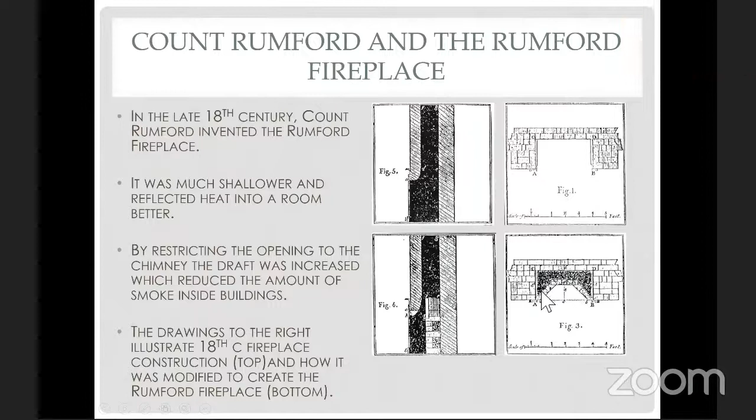Rumford developed a shallower firebox, and you could see this one was actually drawn as a renovation of a walk-in fireplace. You see they're much shallower. They have angled side walls to reflect heat into the buildings, so they're more efficient.

You also see that the flue itself gets necked down, and you see this bit of extra construction here necks down that flue and creates a smoke shelf. He was very inventive and worked through the dynamics of smoke being drawn out of homes.

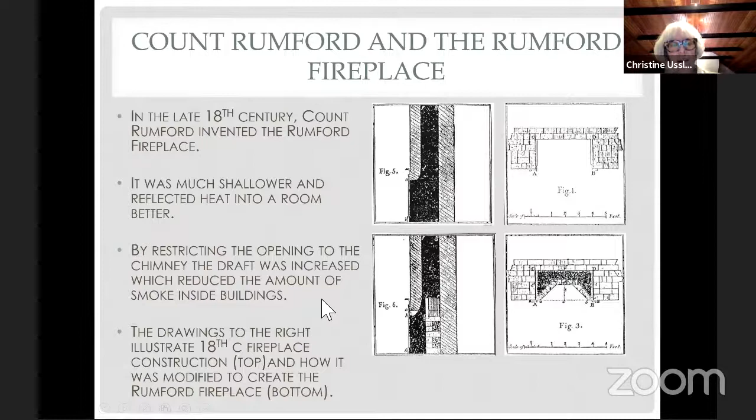So he was really very interesting. He goes on, and actually develops what is the forerunner of our ranges and stoves. But earlier in the 1700s, German settlers brought with them the five-plate stove to Pennsylvania, and that's the grandparent to our ranges and stoves today.

And of course, many of you know Ben Franklin, and he developed variations of this original stove, resulting in the Pennsylvania fireplace and the Franklin stove, shown in an image on the right.

Then, as I said before, Count Rumford developed, at a similar time frame with Ben Franklin, something more like a range. It might be a little hard to understand this drawing, but the top part is an elevation view showing the area that had, in plan, openings where you could sit pots in, and then you could have three separate fires going to develop the heat for cooking.

This was a roaster, and this is the fireplace right here, and I think they also had a bake oven. So he had this very large masonry construction that starts to look like a range.

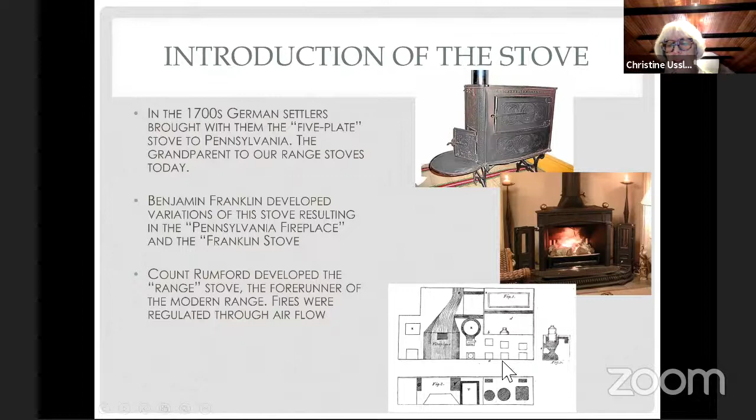Shifting gears a little bit into the Industrial Revolution time period, we have a housing boom and a factory boom. Both factories and houses needed chimneys—factory chimneys vented large boilers and other furnaces, and residential chimneys vented fireplaces and stoves and eventually heating systems.

It had 272,000 bricks in it to construct it. The interior flue was 6 feet wide, and they actually constructed it from the inside, with scaffolding lifts from inside to build it.

Apparently the draft is so significant that if you were to drop a handkerchief at the bottom, it would take only one second to come out the top. The other really fun thing is that it was apparently quite an attraction—when the chimney was completed, they allowed visitors to have a look by sitting in an armchair that was hoisted by a steam engine up to the top. I just thought that was fantastic.

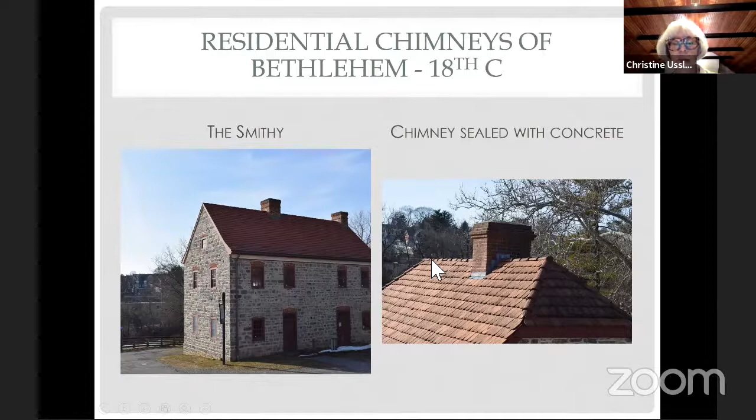The opening to it is on the side. I unfortunately don't have a picture of that. But the fire was not seen as something to look at - it was heating up this masonry mass that would radiate heat into the space. So this dates from the 1740s, I believe.

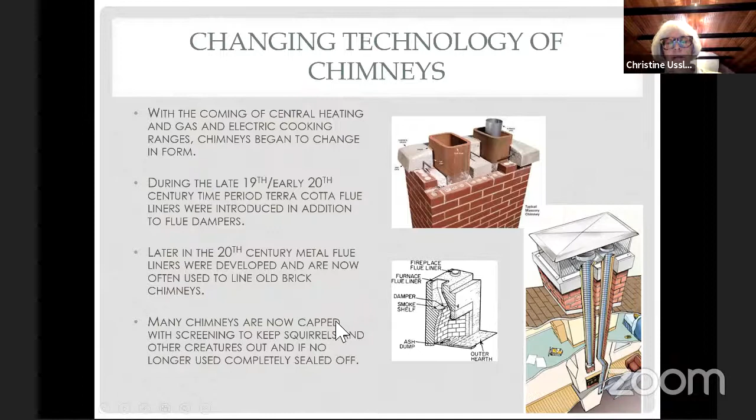So the question from me to Peter and Scott is: what can we do that allows the birds in and the squirrels out?

This, fondly known in the construction industry as a gas fireplace doghouse, is the fireplace with a simple vent out the back. Chimneys, though, generally are still constructed for wood burning fireplaces.

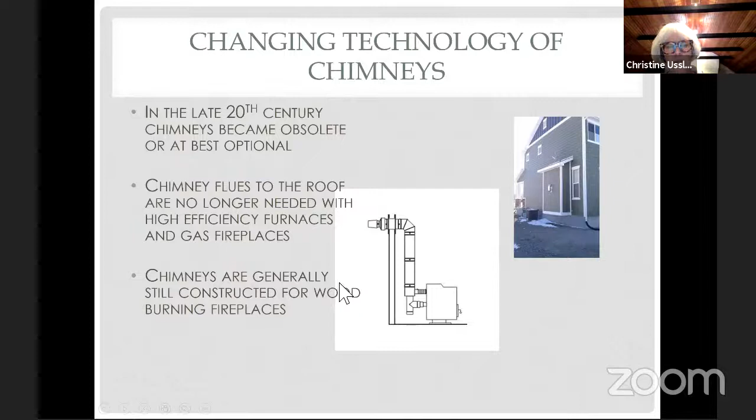I wanted to take you a little further, to look at chimneys as high design architectural features. I have just two slides and four images of some unbelievable architecture for chimneys. The two here are works from Edwin Lutyens, British architect of the late 19th century. Chimneys were a signature of his buildings.

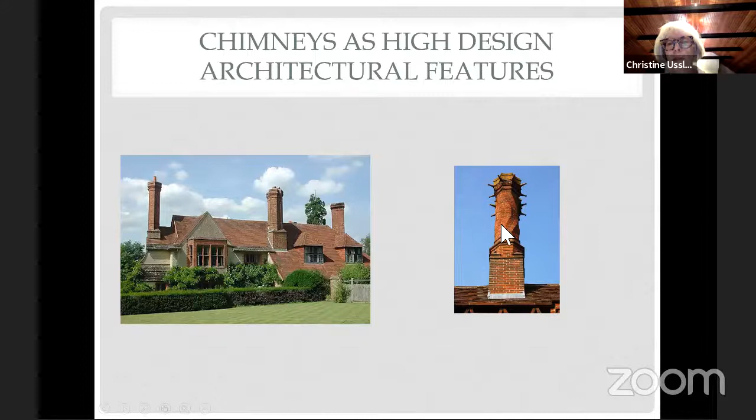You see them rotated and twisted and multiple ones grouped together so that they become quite a focus on a building. And you see the delightful form here of the twisted chimney.

And then the most unbelievable chimneys you will find in Spain. In the same time frame, what's hard to believe to me is this is the 1880s, and these are by Antonio Gaudí. The chimneys are fantastical sculptural works of art that populate the roofs of his buildings. They are just hard to believe, these forms, and how they were created, how they were designed, how they were built is quite stunning.

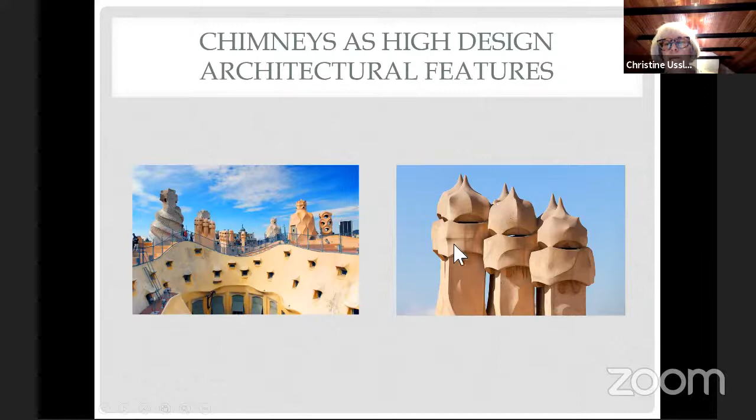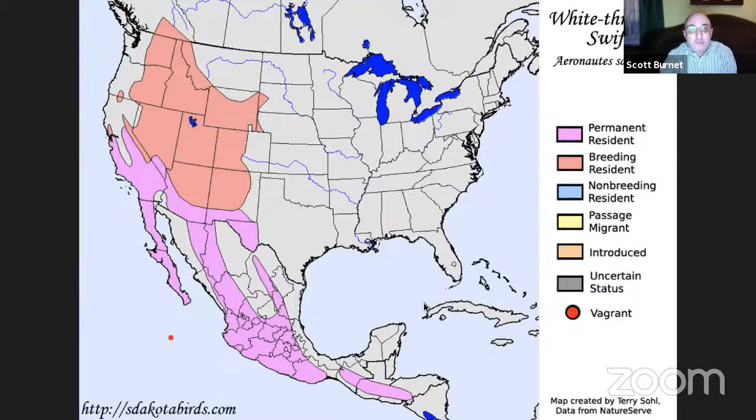Here's another type of swift found in the United States: the white-throated swift, only found west of the Rockies. We have the chimney swift, which is only east of the Rockies. I'll show you their range map in a minute.

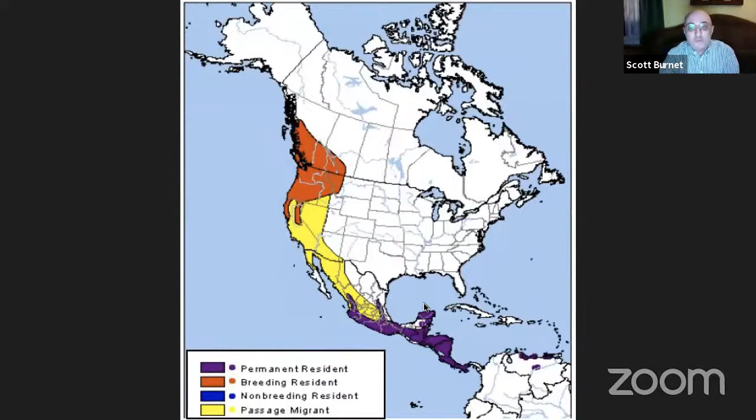This is another swift called the Vaux's swift. It's a western swift, looks very much like the chimney swift, same habits, but it's found west of the Rockies. We only have one type of swift east of the Rockies, and that's the chimney swift.

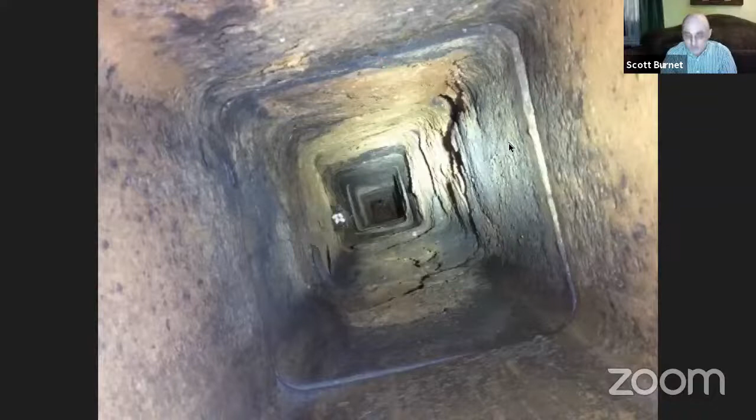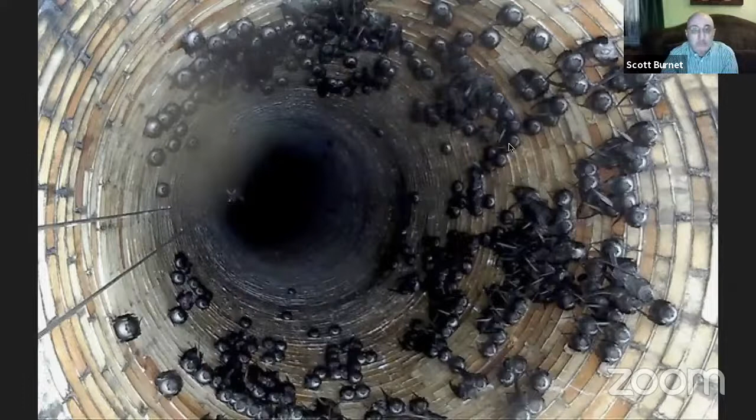Every year we get one nest of swifts in this particular chimney, and then a few will roost in there in the fall. I don't know how long they've been nesting in there. As Christine said, during the early periods of these residential chimneys, they burned the stoves constantly - maybe in the 1800s sometime when that practice stopped, the swifts would have moved in and used it as a nesting and roosting site.

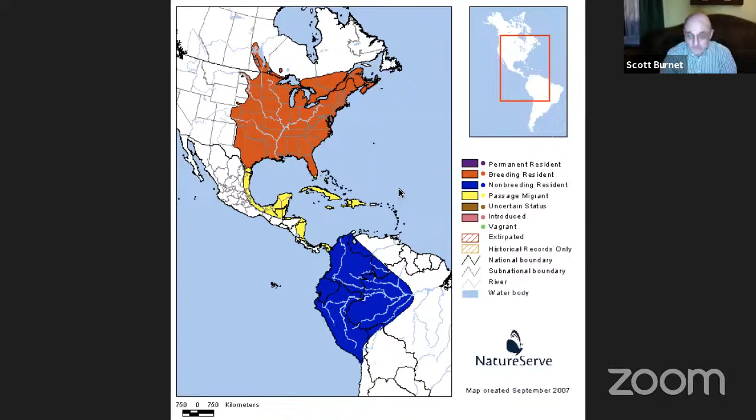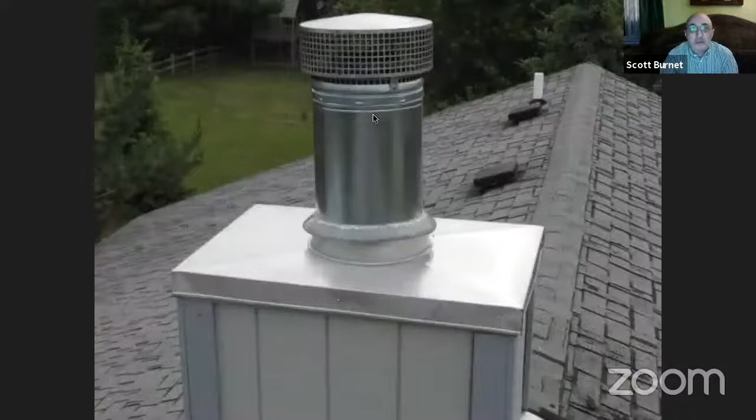Again, another type of cap chimney. Sometimes people will add these to their chimneys after the chimney's been open for years. If they do that, this excludes the swifts when they return in the fall.

Again, this is a metal flue, one of these new metal flues they're using. Even if it's not capped here with this screen top, it's completely useless to the swifts because their little claws can't purchase anything on that smooth material. Another stainless steel flue, screening, swifts.

Really a kind of unique structure that she built there. I believe it's still standing.

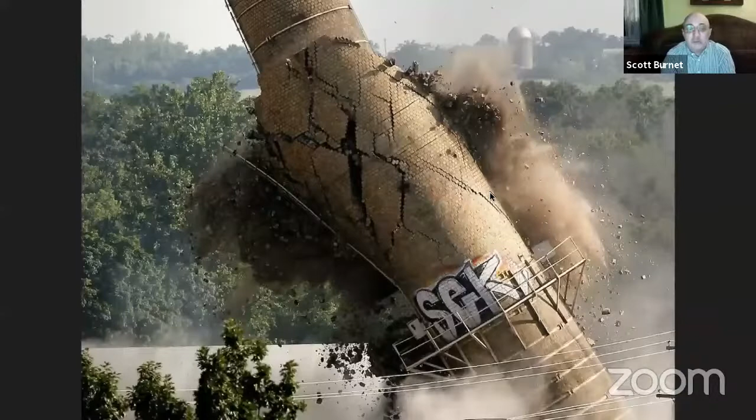Again, this is the plight of these big chimneys nowadays. There's me building one of the towers. I think that's the end—I just wanted to show you something else quickly here.

Here's the inside of her tower with the staircase, and this shows one of the viewing windows here to look inside the chimney.

Maybe I don't have that slide in this batch. I was just going to show you the close-up of the nest, which I don't have in this group of slides. I'm sorry.

The nest is attached by the saliva of the bird. The bird brings in one little twig at a time, coats it with saliva while holding it with one foot, and sticks it to the side of the chimney. It takes this bird a long time to build a nest because each nest has approximately 265 twigs in it.

To gather these twigs, they have to do it on the wing. They cannot land on the ground and pick up a twig—they have to snap these little twigs off the tree in flight. So it's a pretty big deal for them to attach a nest.

The surfaces of these masonry chimneys is ideal because they have these ledges and mortar joints that allow them to do so. So the big thing for us nowadays is the conservation of these older chimneys, if possible, such as is happening at the Masonic Temple.

John Noble is leading the way as a developer who's willing to help these birds. We hope to foster more of that through his efforts by spreading this educational material around, getting people involved and aware of what the swifts are, how beneficial they are, and how much they are part of our community.